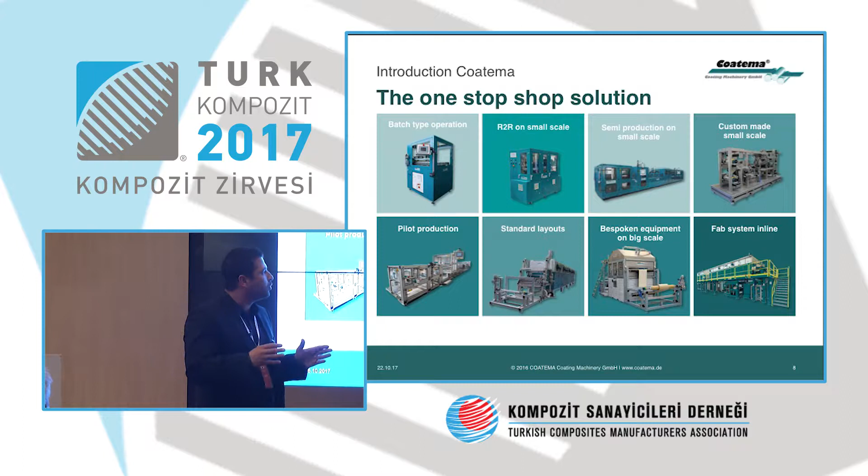COATEMA offers a full range of machines, from laboratory machines and pilot machines up to production machines, and offers a big scale of different application systems for different production processes, like slot die, double-side coating, commabar, two-roll system, powder scattering, and more.

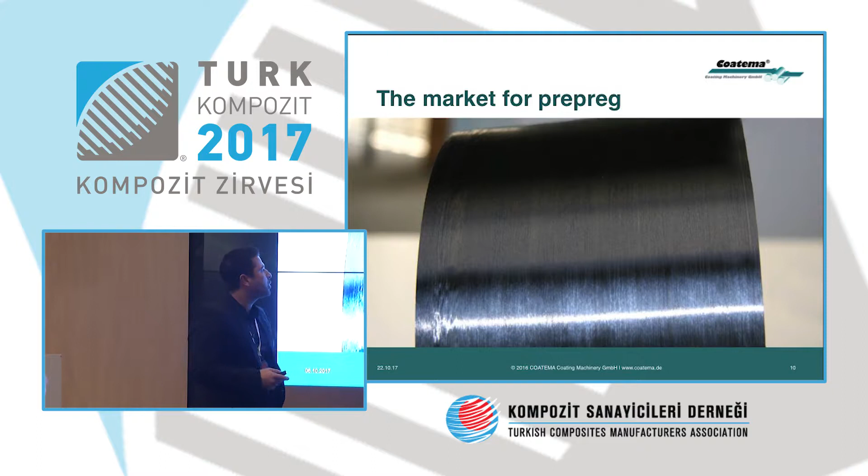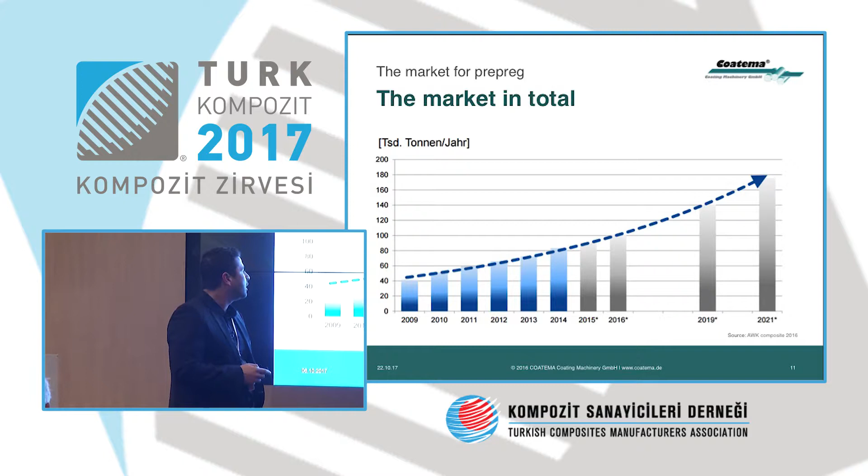Let's now move to the market of prepreg. Prepreg is a high-performance product, 25% lighter than aluminium and up to 60% lighter than conventional steel. In 2016 more than 100,000 tons of composite materials were produced, and research projects more than 170,000 tons in 2021. Prepreg is used in varied sectors like aerospace, wind energy, automotive, medicine, and more. Many people benefit daily from this material in daily activities like sport, the way to work by car or by train, or flying on holiday by plane. Here we can see from the Lucintel analysis that growth affected most sectors for prepreg, like transportation, marine or wind energy.

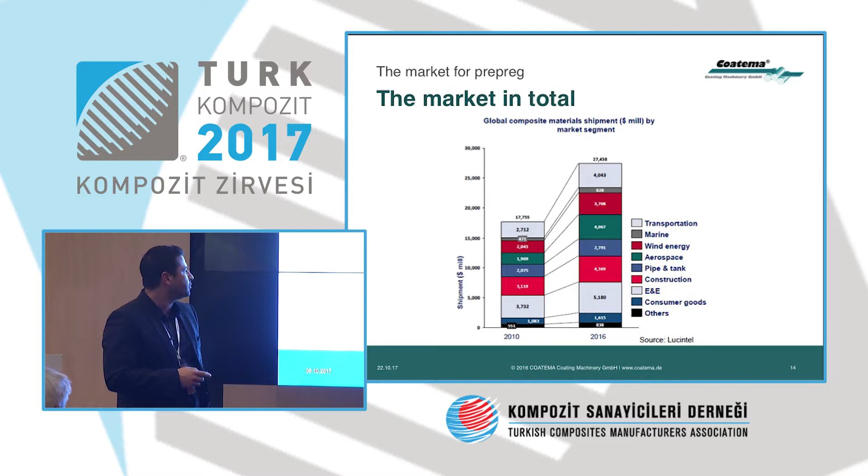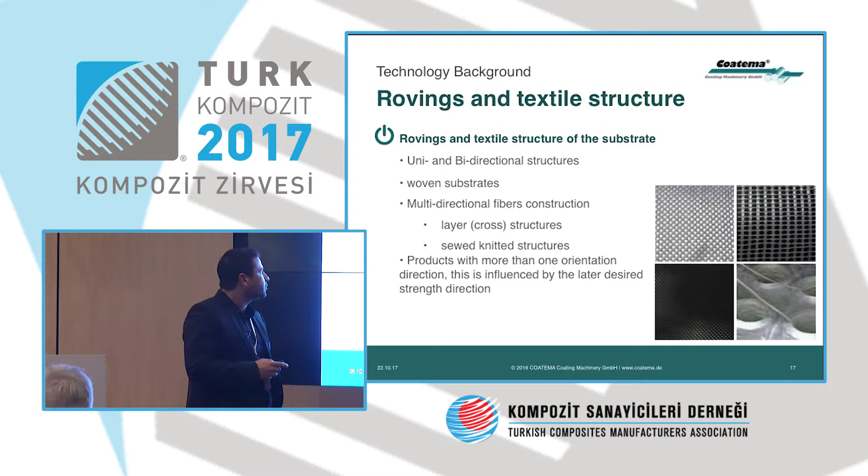Let's now go to the background technology of prepreg. Prepreg means pre-impregnated fibers. It is a combination of a matrix system and reinforcement fibers or reinforcement systems. The reinforcement systems are offered mostly in the form of carbon, glass, aramid or synthetic fibers. They are in the form of non-woven or woven systems, uni- and bidirectional structures and multidirectional constructions. As matrix system, mostly thermosetting or thermoplastic prepreg is used. Thermosetting cannot be reformed or remolded after curing, but thermoplastic can.

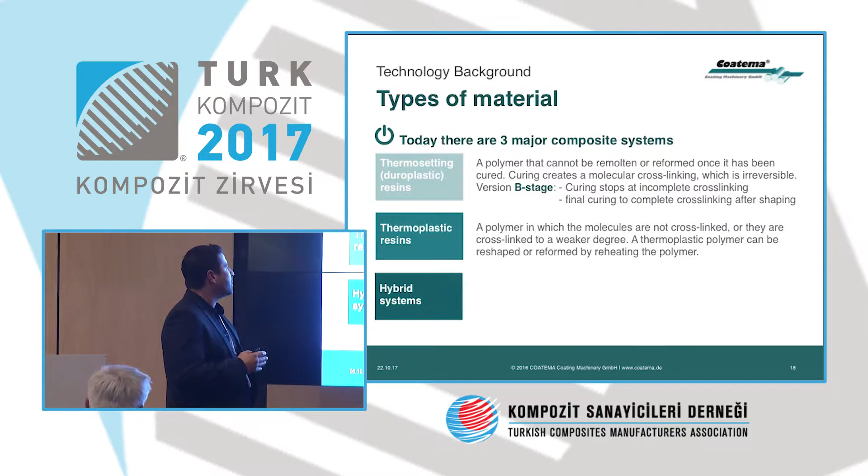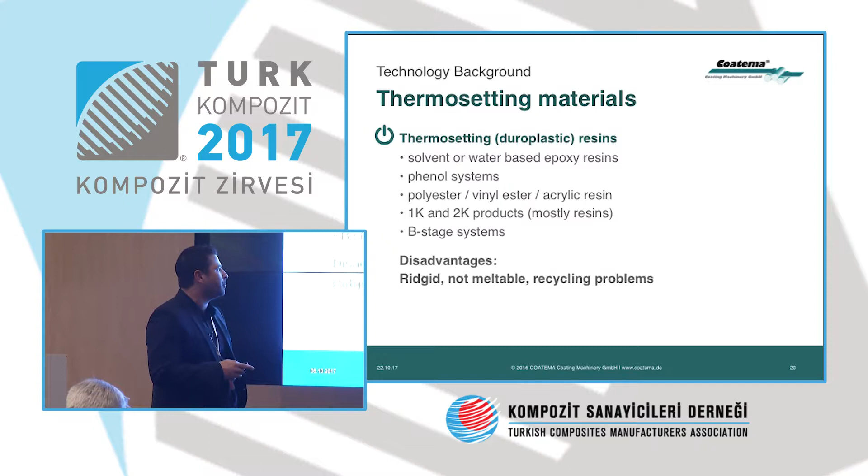Now let's move to the thermosetting material. Thermosetting is used as resin, as water-based epoxy resin or phenol system as solvent resin. The disadvantage of this material is that it is rigid, not meltable, and it has a big recycling problem or cannot be recycled.

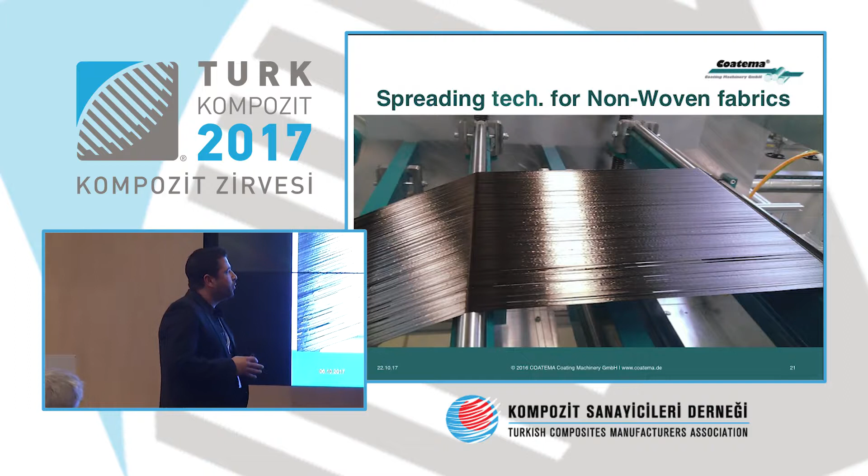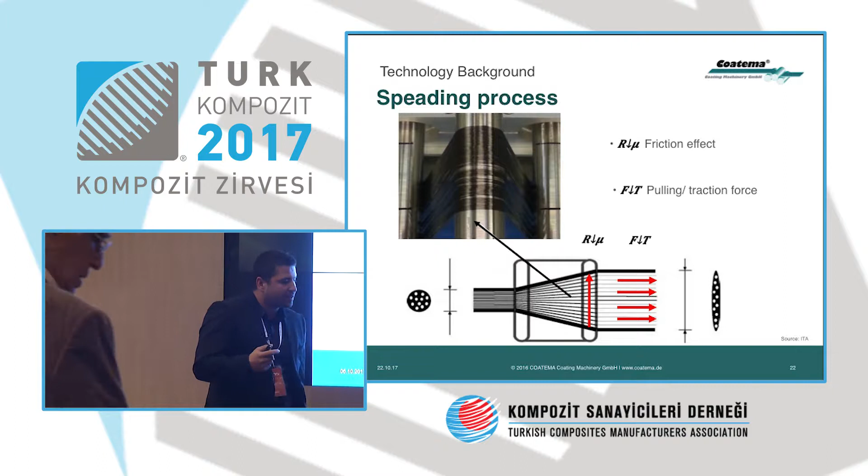Before going to the layout, I would like to say a few words about the non-woven fabric. Non-woven fabrics are mostly used for the production of prepreg. The spreading and the unidirectional tape are made with spreading technology. The spreading of roving is made via friction effect by pulling the roving about a fixed rod with high tension. Here we can see an example of a spreading device. The spreading can take 1 or 2 plates, depending on the coating weight.

To ensure perfect spreading, it is very important that from inlet to outlet of the spreading device, all rovings are positioned parallel to each other, and that each roving runs without twisting. That can give a better result for the final product.

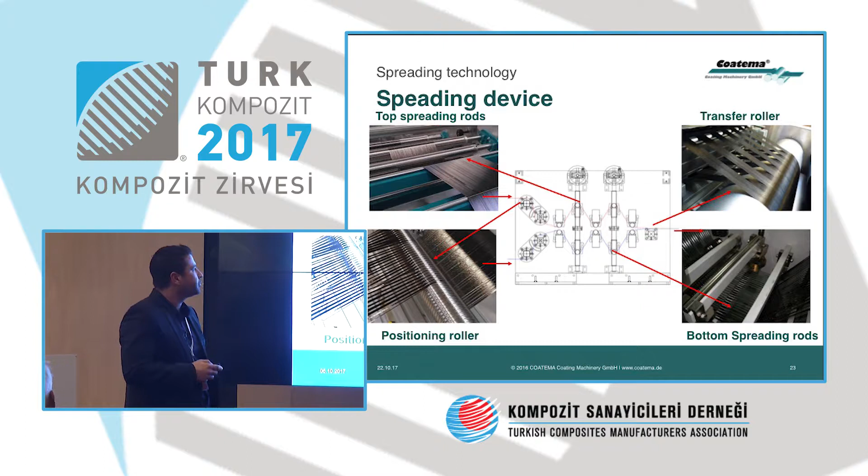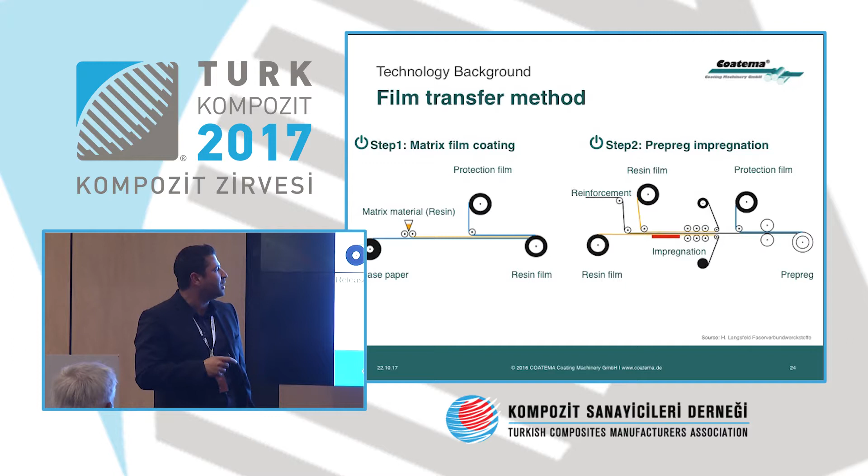The process of thermosetting can be made in 2 steps. In the first step, the matrix material as resin is coated on release paper to produce a resin film. In the second step, the reinforcement material is impregnated between the 2 resin films from the bottom and from the top, with high pressure and high temperature in the impregnation zone.

This is an example of a layout of a production machine from COATEMA. This machine can make the 2 steps in one. As unwinding for the non-woven system or UD tape, we use a creel station and spreading unit. For the fabric, we use a normal unwinding station with accumulator and splicing table.

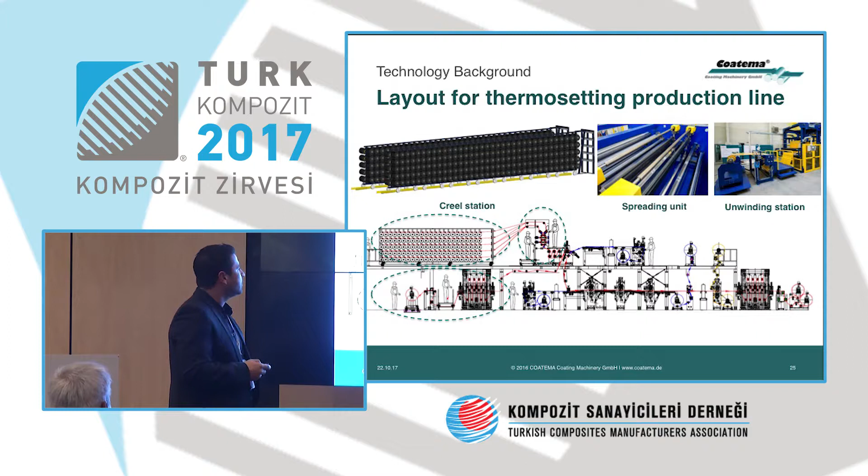For the impregnation of the release paper of the resin film, we use the first coating system on the top, and for the bottom coating, the second coating system. And then in the impregnation zone, we press the 3 materials with high temperature. We call this process wetting.

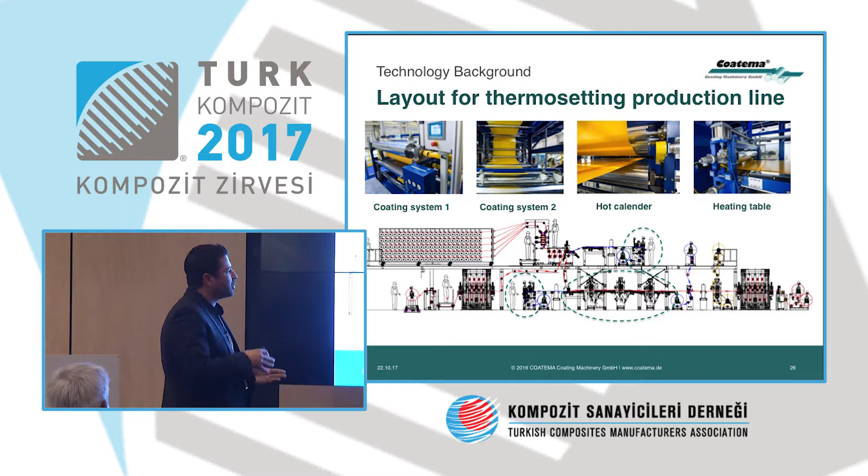After that, the paper is removed and the material is recovered with the protection paper or film in the delamination and lamination station. After that, we can cut the material to the needed width with the cutting device and rewind the material. This material must be conserved at very low temperature, like in a frozen room at -20 degrees, to avoid the reaction of the matrix system of the resin.

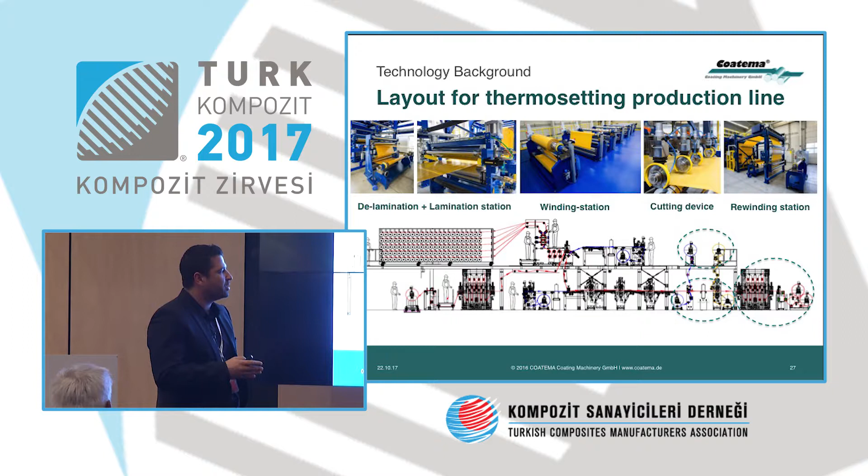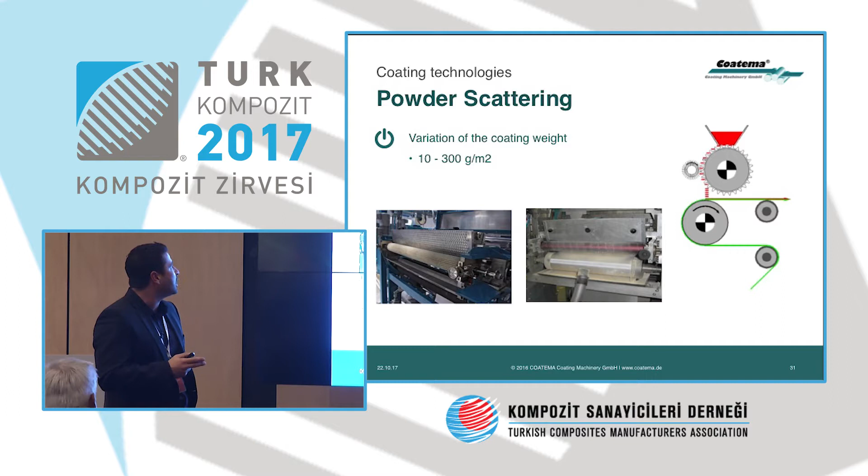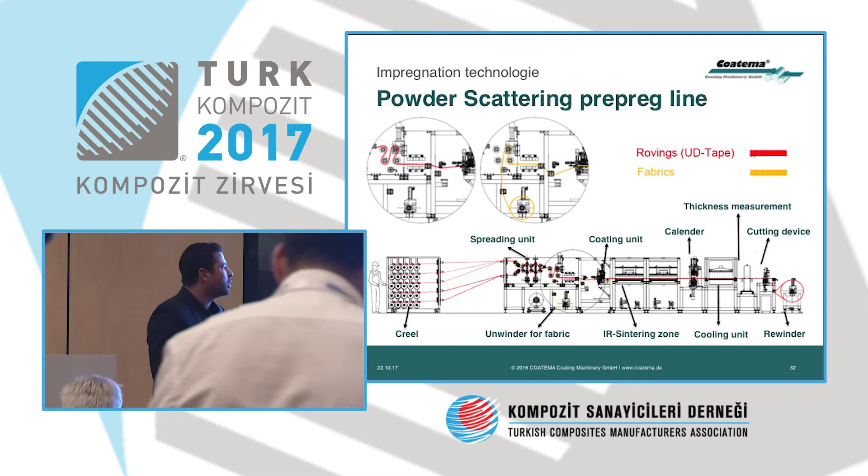The principle of the machine is the same as the production machine for thermosetting. We have a creel for UD tape, a spreading device, an unwinder system for the fabric, a coating system, and then for this process we need a high temperature IR sintering zone. For PEEK we need a temperature of more than 400 degrees. And for the pressing we also use a high temperature calender with more than 400 degrees. After the impregnating, we cool the material, cut it and rewind it.

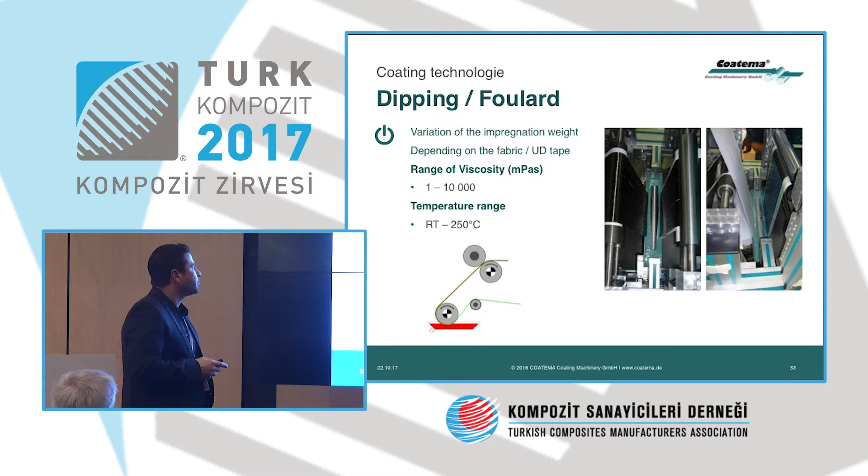In many processes, we use the Foulard with solvent, but it is very dangerous to use solvent with an infrared heating system. That's why COATEMA developed a drying roller system for the evaporation of the solvent before the product goes into the sintering zone.

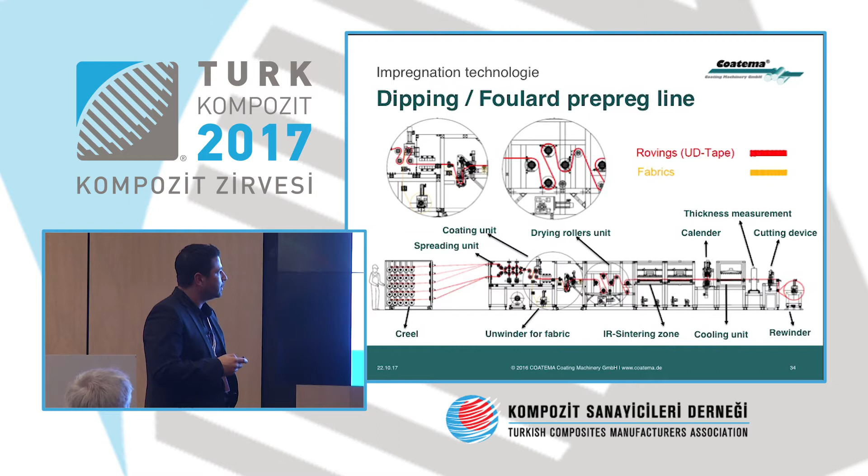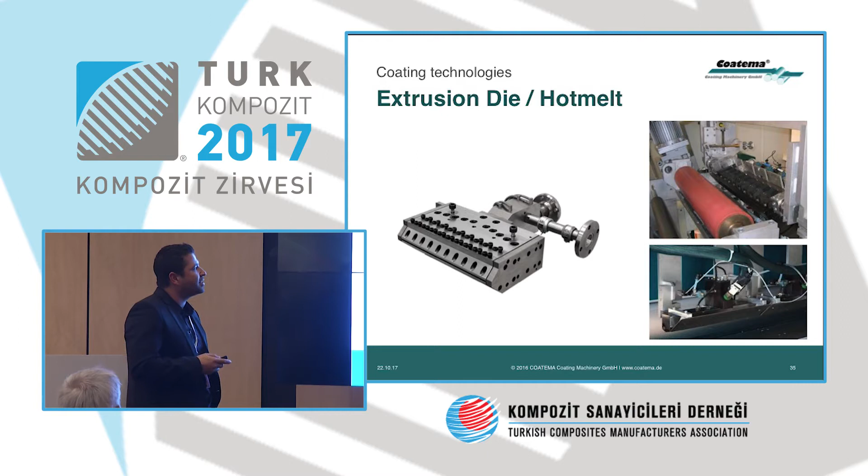Also, COATEMA uses an extrusion die system. This is a heatable slot die. This system can be connected to an extruder and can coat the substrate on both sides. But it is a very expensive system.

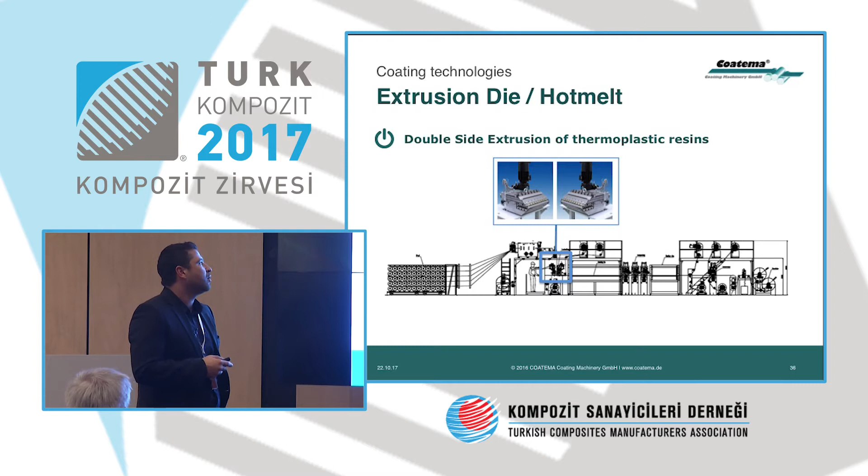All these components can be integrated in the special Click and Coat system. The Click and Coat system is patented by COATEMA, and it is a modular system. Each module is placed over special rolls, and each module has its own control system. With only one click, we can add or remove each module for the different processes we need.

This Click and Coat system offers different kinds of modules. We can integrate a winding station, different coating stations, different kinds of drying or cooling systems, measuring systems, laminating systems. One of these machines is at our R&D center for tests of different processes.

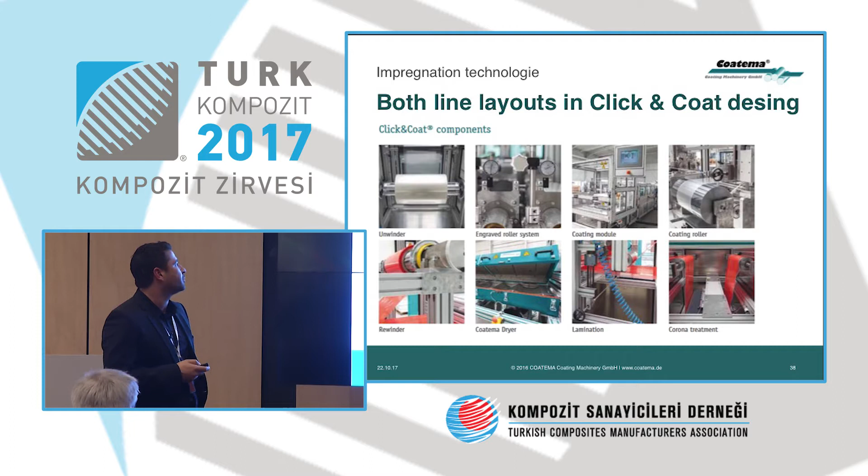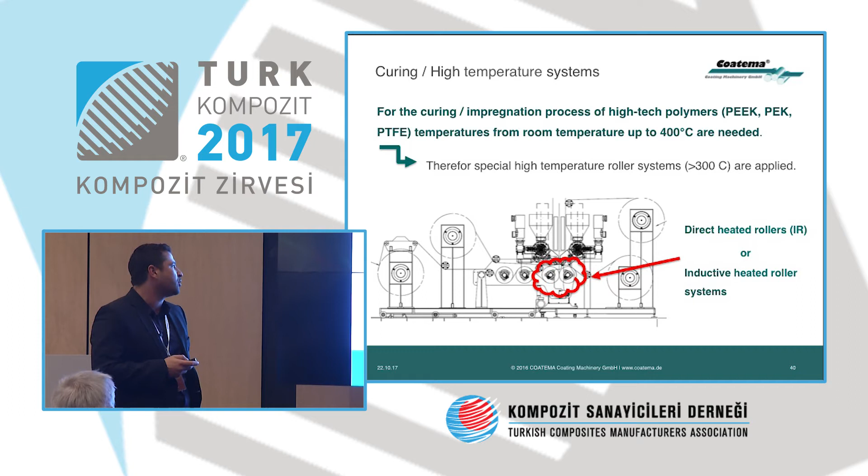And the second important part of the production for thermoplastics is the curing systems. For the curing of high-tech thermoplastics, we need very high temperature, about 300, maybe 400 degrees. For this, we use direct heated rollers with infrared and inductive heated rollers. This is an example of an IR heated zone. It's heated with infrared, and we can divide the distribution of the temperature into different zones along the working width.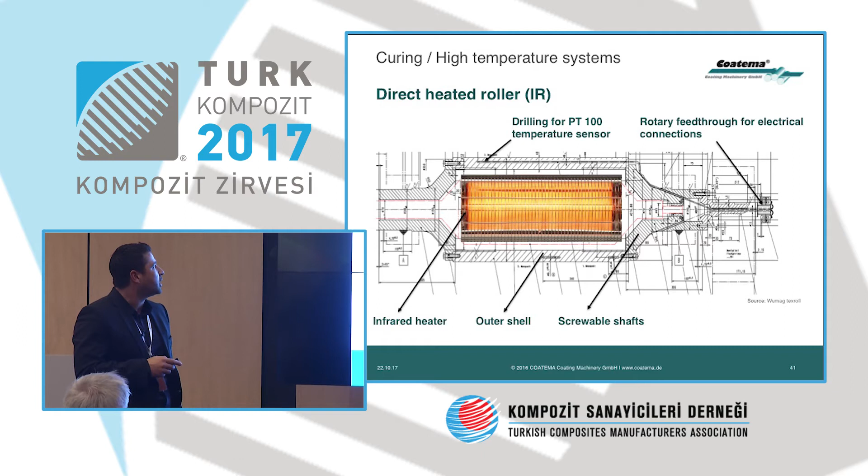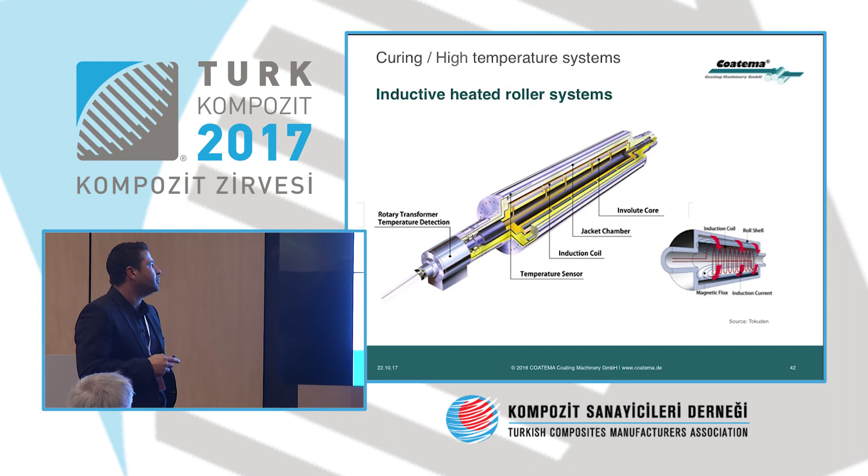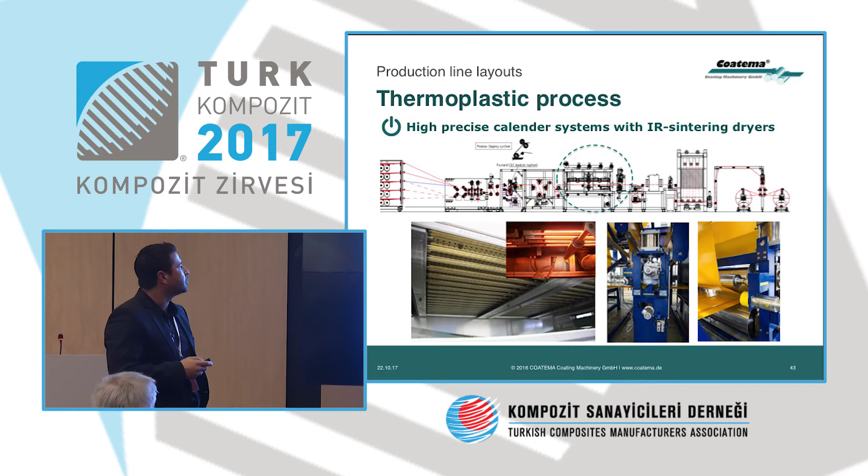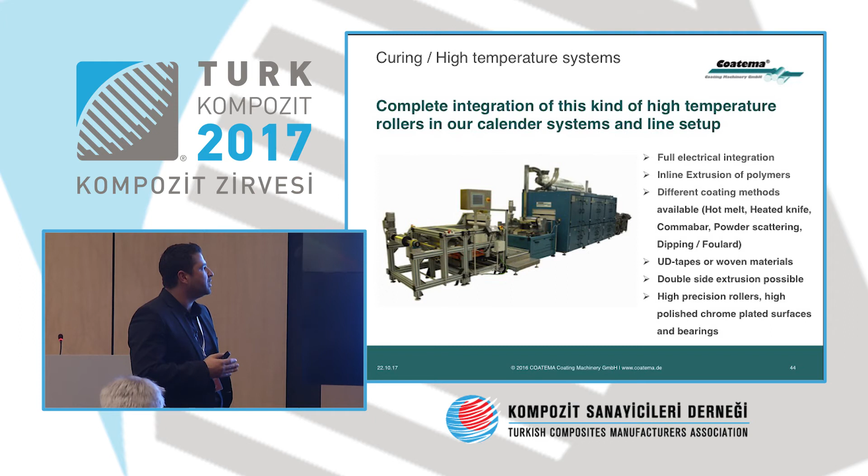And each zone can be controlled with a special temperature sensor. And this is an example of an inductive heated roll system. The jacket chamber heats itself, but this system is very expensive. For our production and curing system, we combine an air infrared dryer with high temperature calender systems. Both can process at above 400 degrees. COATEMA is very flexible and can integrate this roll in all coating systems or in very different parts of the machines.

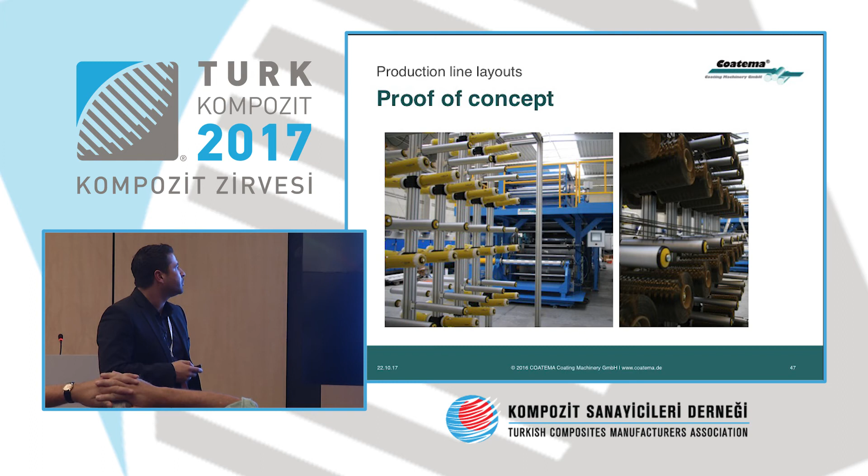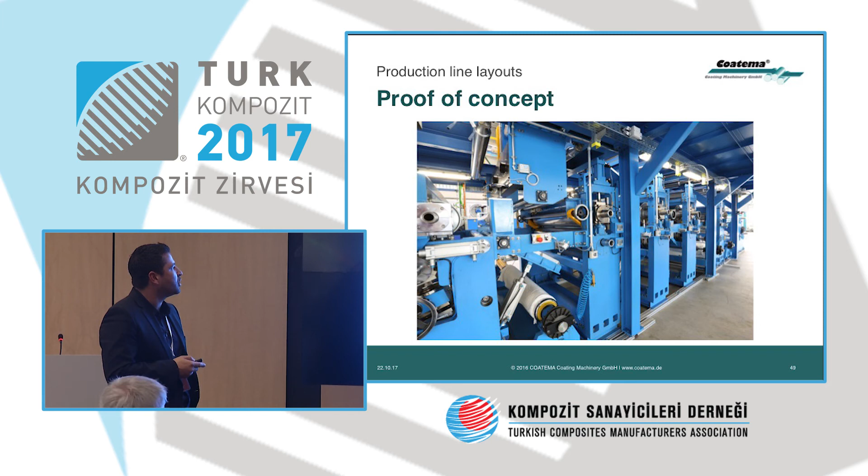Now coming to the production layout of different production machines. Here we can see an example of a thermosetting production machine with 1 meter working width. This is an example of the creel system for the unwinding of rovings. Here, different images of the coating system for the top and for the bottom. And our impregnation zone with high pressure calender. Here in more detail with the heating table.

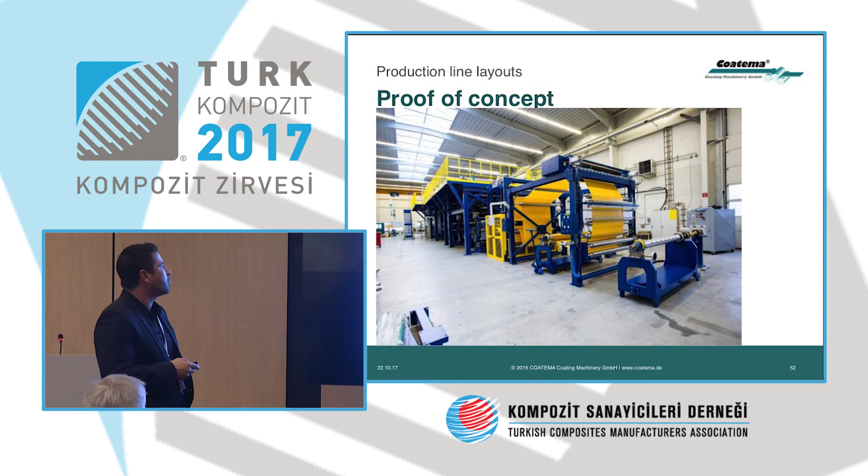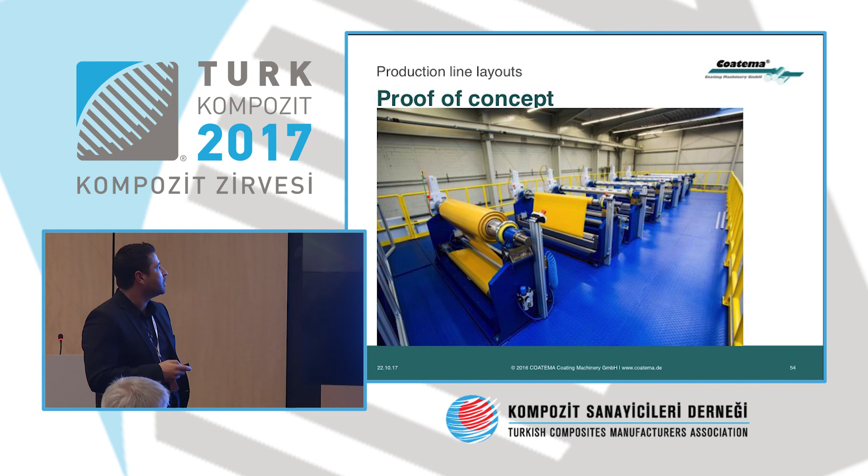And here we can see our production plant for thermoplastics. It's bigger than our thermosetting one, with 2 meter working width. This is the rewinding device with splicing, cutting system and accumulation system. This machine can work without stopping thanks to the accumulator systems. Here's our spreading device on the machine, the winding systems, and this is our dryer to evaporate the solvent. And after that is the infrared sintering zone.